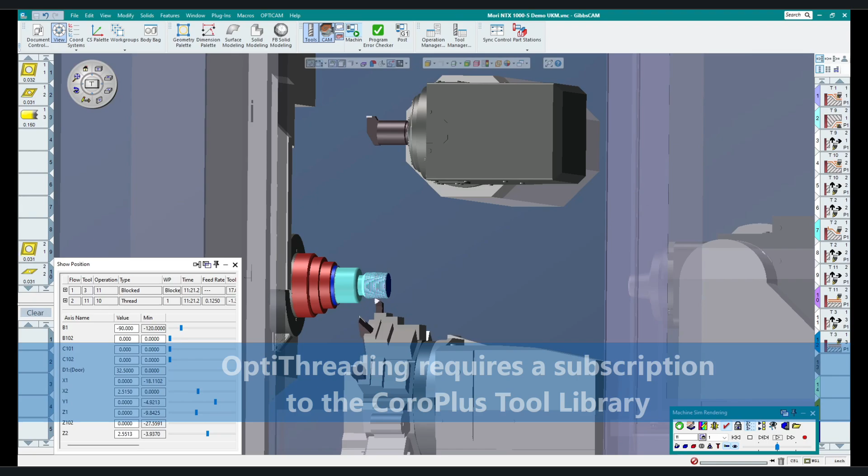Now keep in mind, in order to generate this toolpath, you do need to create your tool in the CoroPlus Tool Library, which does require a subscription. This is where the cutting data we need for this process is stored, so make sure you've got that squared away first, otherwise you won't be able to create the OptiThread toolpath.

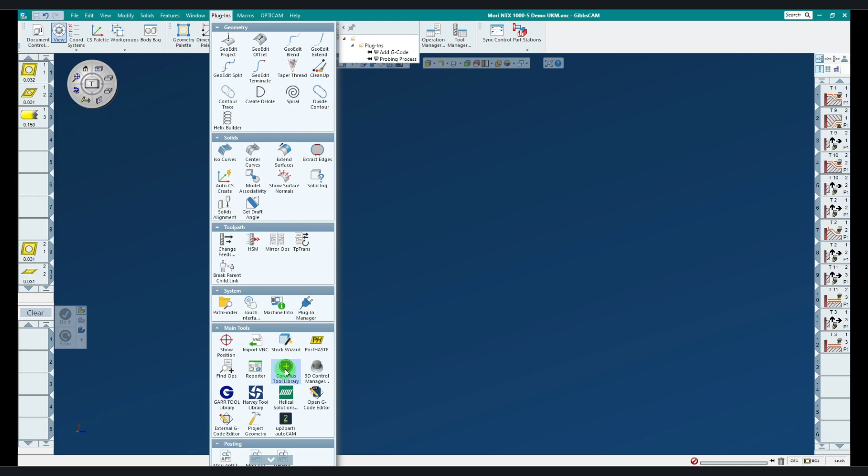Now, once you've got your CoroPlus subscription set up, you can log into it while in GibbsCAM by selecting the option in the Plugins menu at the top. So I'll go up to Plugins, and then down to select CoroPlus Tool Library. That's going to open up another window, and this is where you would typically log in for the first time, but I've already done that, so we just wait a few seconds here and it will load my library.

And once that comes up, I can click on the New Assembly button to build a new tool. And that's just going to load the CoroPlus Tool Library catalog. And here on the left, we've got a couple of options we can go through to help narrow down our search.

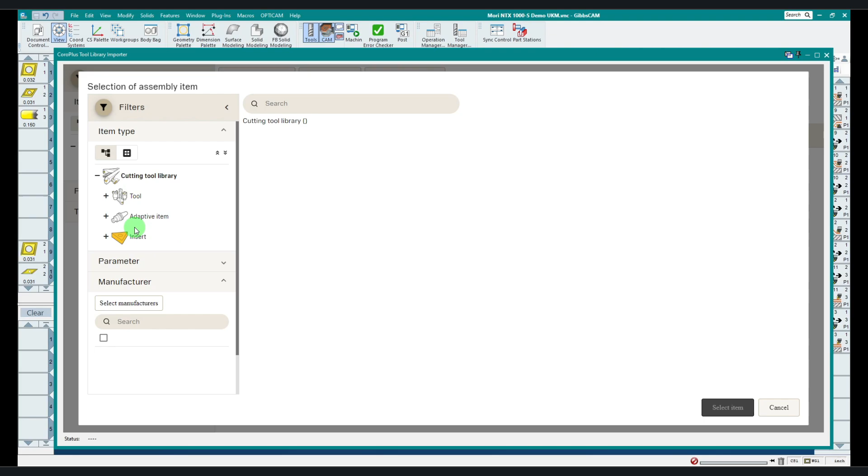And I can go choose Tool, Turn Tool, Thread Turning Tool, External Thread Turning Tool, and then just the only option within there, and that's going to narrow this down for us.

And then I've got a couple of other parameters I could look at. Maybe I want to choose the direction here. I'll find the first right-handed one. There we go. And then B is the shank size, so maybe I'll find, say, 5/8. This one looks good. I'll click on this one.

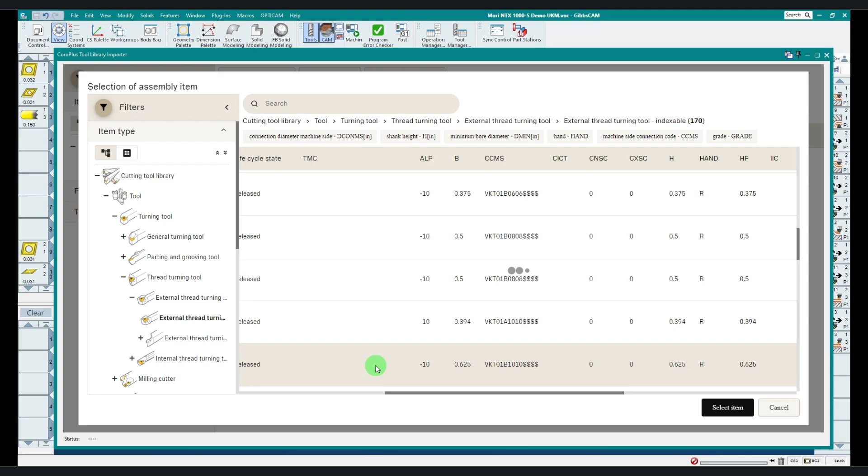It's going to load some information about it. I'm just going to choose Select Item. This is going to load it into the assembly page where we can add an insert to it once it appears. And when it does, finally, we can click on the little insert icon right here.

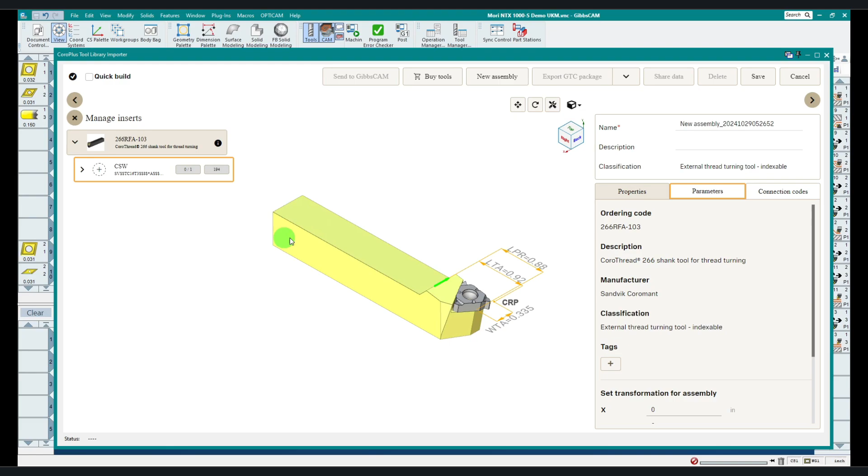And that's going to show us that we've got 194 options for this holder. So I'm going to click on this button. And it's going to load the catalog once again, but this time just with inserts.

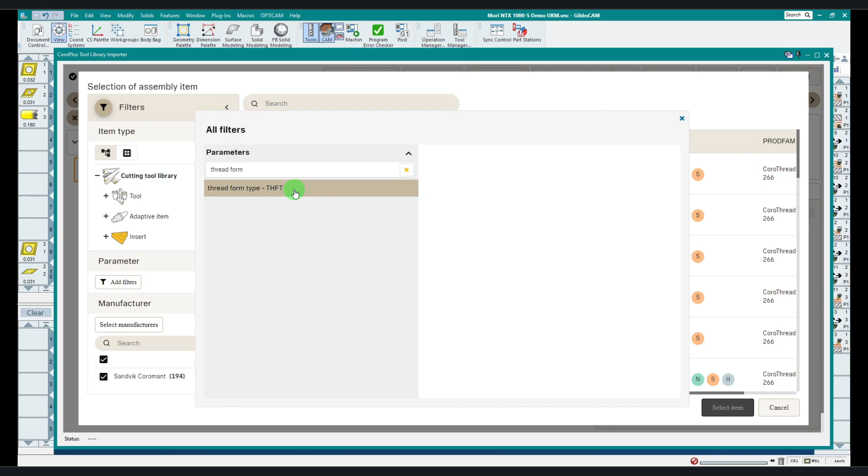Now there's a parameter option here where you can add filters and go in and search by maybe TPI. Choose a number there and hit apply, or even thread form type. These are usually the ones that I use. Or you can choose what style of thread you're trying to create. Or of course, you could just go through here and look at some of these parameters and pick one.

I'll just grab this one right here, random, see what we get. And while it's building this model and loading the insert into it, maybe I come over here and give it a new name. Call it maybe OptiThread Tech Tip.

You could even put description stuff in here, insert number, holder number if you prefer. But once you've got everything typed in, go ahead and click the Save button at the top. That's going to generate this GTC package and save our assembly.

Now take note that while we wait on this to save, there's only 3 tabs available right here in this little window. But once this finishes, a 4th tab will appear, and it will be the Cutting Data tab. And that's where we can apply cutting data to this tool.

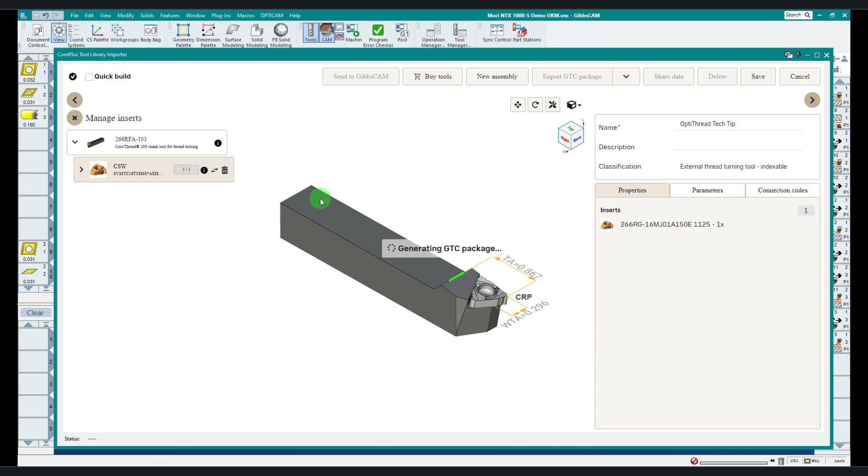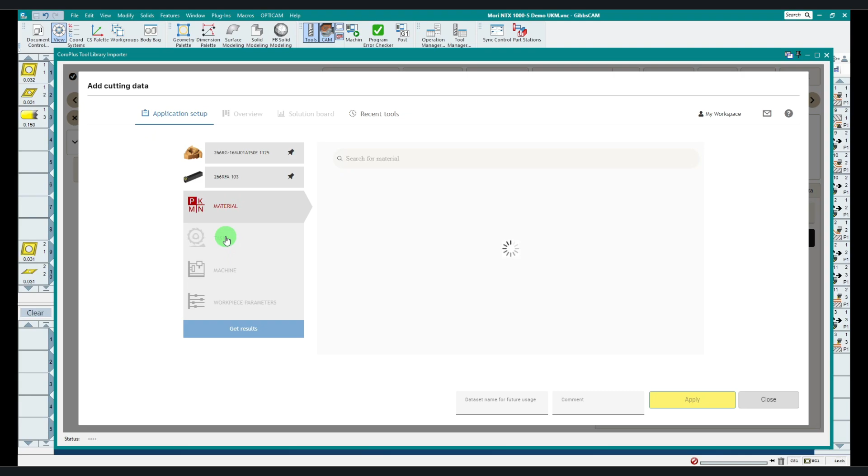Now I'm going to go to the Cutting Data tab, and of course we don't have any for this tool yet, so we can specify our own and manually enter the values if we know them, or we can get recommendations. So I'm going to click Get Recommendation, and then build some parameters to my application here: material type, task—which would be external thread in this case—the size of our machine, and some thread parameters.

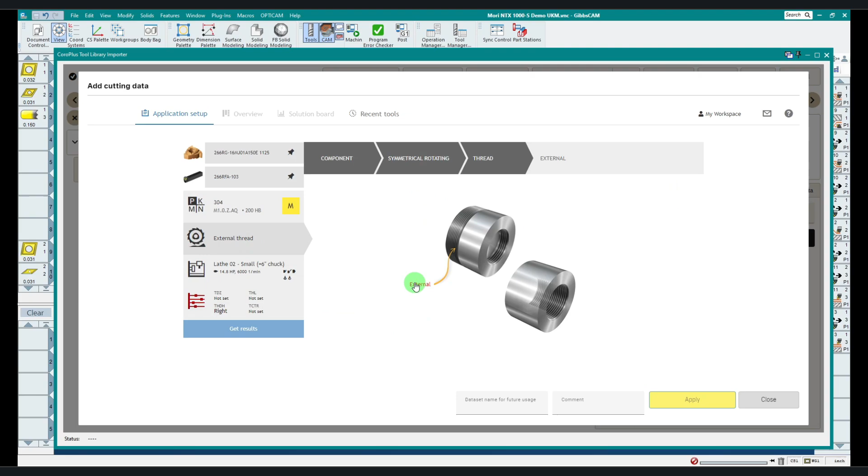On material, I've got Sandvik reference materials, but also recently used. If you go to the reference materials, these are all the families you can search through to narrow it down, but I'm just going to go with recently used and choose 304 stainless steel. I'm doing an external thread, and I'm just on a small 6-inch chuck lathe. Now we can build some parameters for our thread.

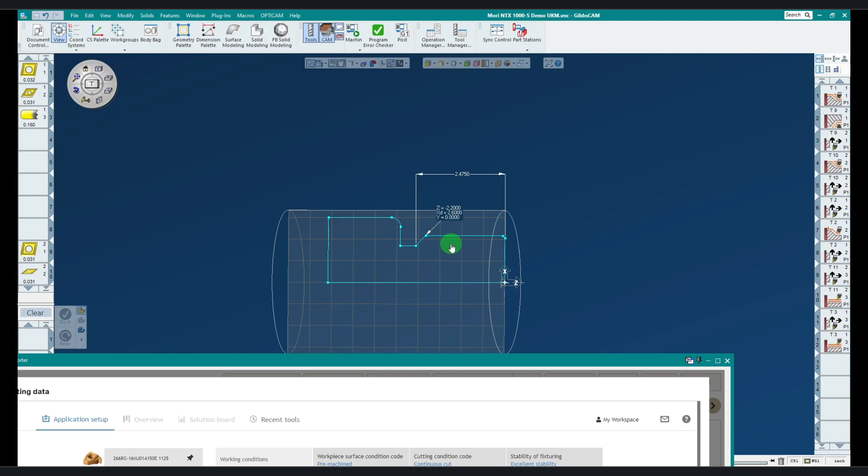I can choose the standards that come with the insert in the CoroPlus Tool Library, or I can define a custom thread size, which is what I'm going to do. I'm going to build it based on my part that we watched in the rendering, which is a 2.6 nominal diameter and about 2.5 long. One thing to keep in mind always in the CoroPlus Tool Library is whether you're working in inch or metric.

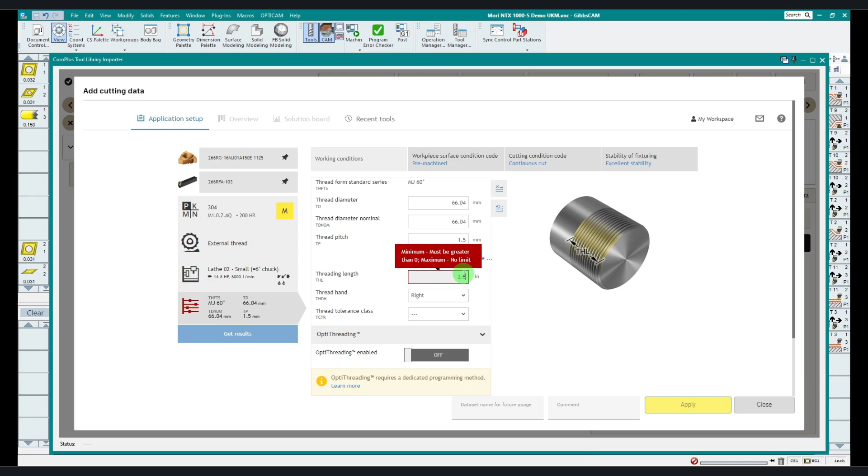For the diameter, 2.6, it wants metric, which is 66.04 millimeters. I'll hit the enter key and it populates both of these boxes with that. The thread pitch is always applied because of the insert. Now I need to apply a thread length, which is standard in inch, so I'm going to just enter 2.5.

I'll, of course, choose a tolerance—6G is the only one available. And then I'm going to enable OptiThreading by clicking this button here. Once you've got all of that set up, you can click on Get Results, and once the results appear, you can click Apply.

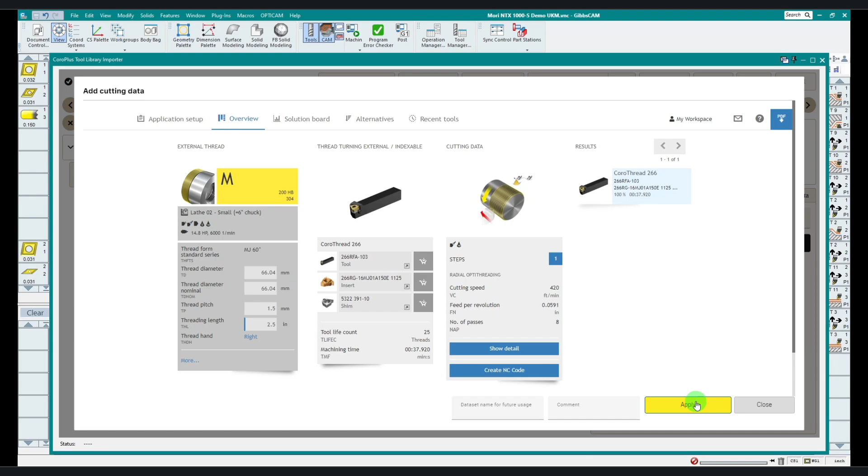This is going to apply that cutting data to this tool. Once you've got that, you can click on Send to GibbsCAM. When you click on this, it starts to export, and it opens up another little window that lets you choose an insert direction.

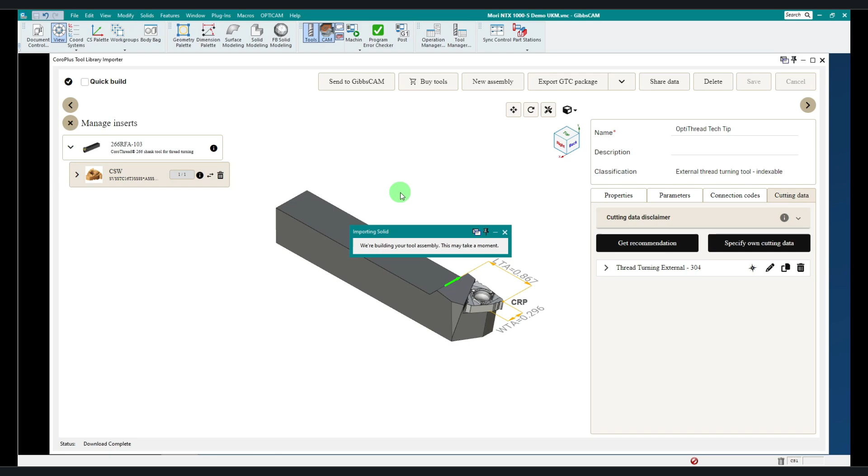This tool's going on a lower turret, so I'm going to choose this option here and click OK. It's going to add the tool to our tool list, build the assembly, and once that's finished, I'm going to close the tool library. You can minimize it or close it, and notice it imports the holder—no insert here, but the holder is here. So I'm going to open up that tool, and there we go. It's in a tool block in the holder that we applied for it.

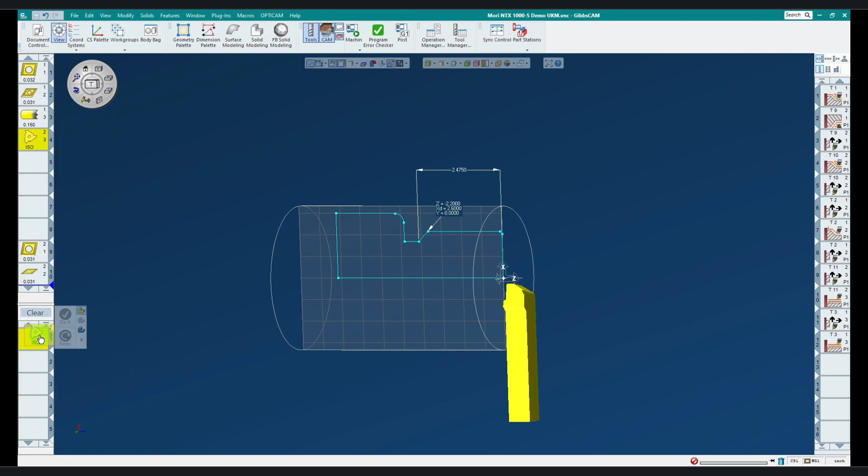So now we can take that tool, drop it down on our process list, and choose a threading process. This is going to load a typical thread process, and you're probably familiar with the definition options here: from parameters and from shape. Either you want to use from parameters and apply these values here to drive your thread, or from shape and use machining markers to apply a start and a stop.

But now, since we're using a tool that has OptiThreading enabled, we have from cutting data, which when you choose it, shows external threading OptiThread forward. It applies the length that we entered in the parameters, automatically creates our number of passes, and it's got the diameters locked down.

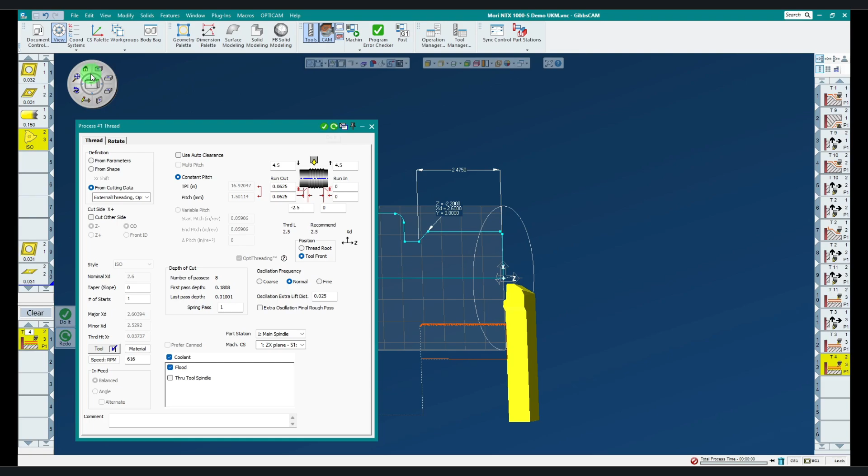So really all that's left to do is hit the Do It button, and you can see we get our OptiThreading toolpath. I'll zoom in and you can see these oscillations that are pretty exaggerated, but that's because I've got a 25 thou extra lift distance. If I put this at 0 and hit redo, you can see it's definitely not as aggressive. So you've got a little control over it, but for the most part, the tool and the tool library build the parameters and the process for us.

So that's basically it, going over building a tool in the CoroPlus Tool Library and then using that to apply it to an OptiThreading toolpath. If you would like to know more about OptiThreading or any other aspect of GibbsCAM, please feel free to reach out to your local reseller for more information.